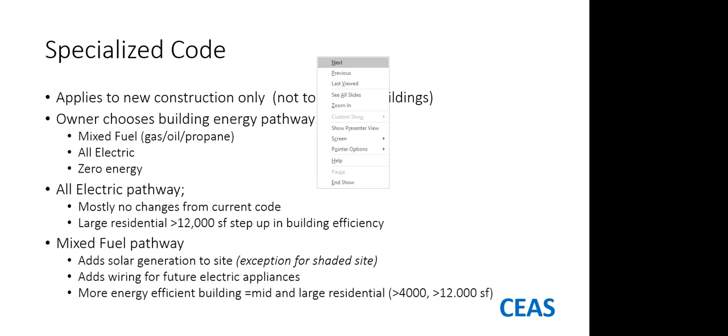It's frozen up again. Okay, so just skip the slide.

On that last slide, it said you didn't have to have solar if you were in a shaded area. So there's an exception for shaded areas for houses less than 4,000 square feet. For greater than 4,000 square feet, I think - and Paul's going to correct me on this when he gets up - I think you have to try to collect as much energy as you can if you're partly shaded.

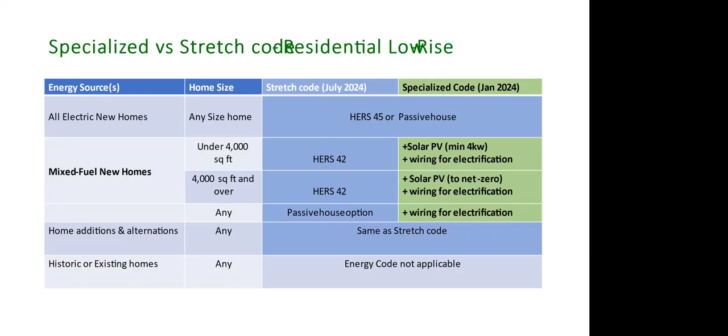Okay, so finally, this is my last slide. Coming back to the reasons for it, building emissions are a principal contributor to total emissions. And it's an important step to address building emissions, to adopt the specialized code. That's why Chelmsford is doing it, and I hope that people from other towns are considering this also.

So with that, I'm going to get out of here and let Paul, I'm going to introduce Paul.

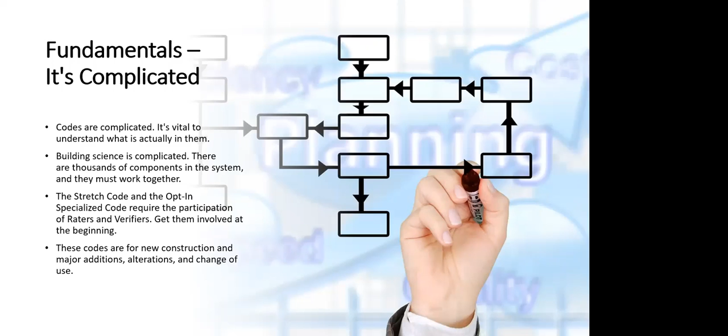If you build an energy efficient home, where do we put the vents for HVAC? The heating systems are on the outside wall, usually under the windows. So if you have better windows and a better wall, you don't need to run the ducts out to that outside wall, and the duct runs can be shorter. The heating system can be more efficient and have less capacity. Particularly if you're using mini splits, there's no ducting and no leakage in the ducting.

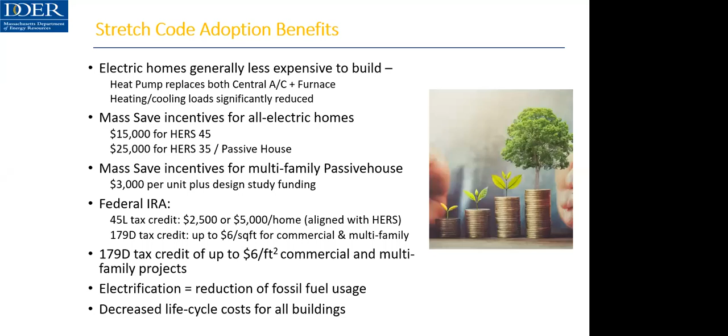Paul, question on this — you say it's 4 communities today. What was the date of that? It's actually 6 communities now. Is that a town meeting they voted themselves into? Yeah, they sort of got in real early. I don't know exactly when they decided to do that, but they really wanted to lead the pack, and most of them are around Boston.

You know, I do, but not off the top of my head — I'm getting old. Brookline, yeah, I think it is. Should be 8. 8, yeah. Brookline, Cambridge, Watertown, Somerville, Lexington, Newton, Lincoln, and Boston, pending signature last week. This thing's moving faster than I can stay on top of it. I just wanted to clarify because of the recording. That's great, it's in posterity, therefore it should be annotated, otherwise there's misrepresentation.

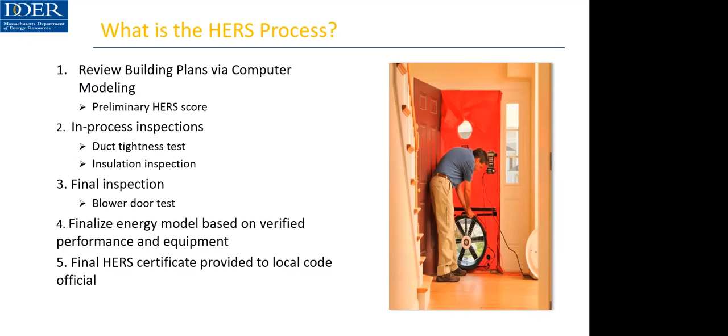When you get down to a HERS rating of 42, you see this big hole? For that house, the hole for 42 is about this big. It's pretty amazing how tight that is. All right, so that's basically a HERS score.

The passive house goes even farther than that. It goes to a leakage of 0.6 ACH50, that's air changes at 50 pascals. Standard houses are around, most of the code is around 3 air changes at 50, so that 0.6 is incredibly tight.

They're primarily heated by solar and internal gains. I had an architect once tell me that if he had 6 people over for dinner, that was all the energy he needed to heat his house. If he could get 2 of them into a fight, he could send 3 of them home. But people generate a lot of heat.

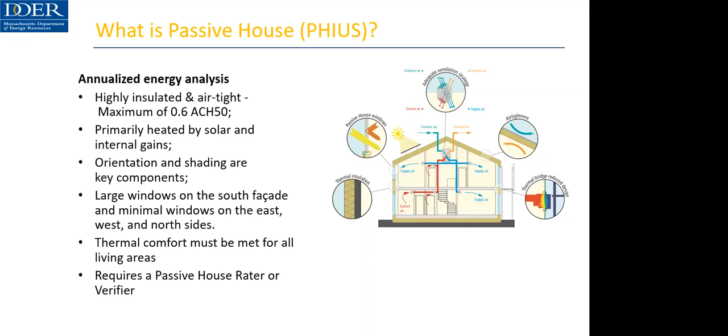Orientation and shading, so you keep the heat coming in and going where you want it to be. The Passive House Institute has a very comprehensive manual, and you need a Passive House verifier to get it done. One of the other requirements, in the ventilation code now, is heat recovery ventilation.

When you get houses that tight, you need to ventilate them properly, and the code requires heat recovery ventilation or energy recovery ventilation. The outgoing air stream exchanges some of the heat during the winter with the incoming air stream, or the heat and moisture if you're going with energy recovery.

What is the difference between heat recovery ventilation and energy recovery? The difference is... is that what this is? Yeah, no, that wasn't it. Okay.

The difference between a heat recovery ventilator and an energy recovery ventilator is that a heat recovery ventilator exchanges the warmth from the warmer airstream with the cooler airstream. An energy or enthalpy recovery ventilator exchanges not only the heat but also the moisture from the wetter stream to the drier stream. So if you're in an air conditioning climate and it's hot and humid outside, the air conditioned house dries out some of the air coming in.

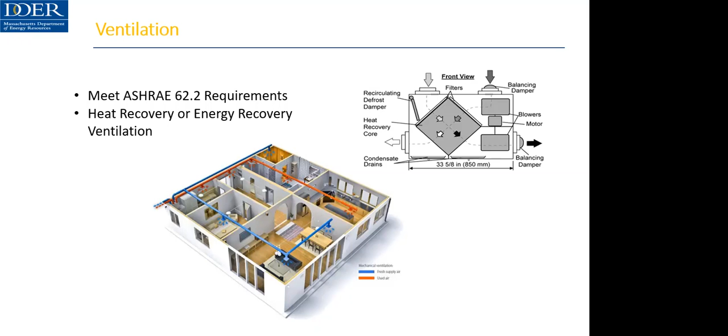And there are some new ventilation systems that actually include heating and cooling coils right in the ventilation system, so you can use this for heating, cooling, and ventilating all with one product. The technology is changing as fast as I can speak, and I don't speak fast.

These have a fan inside, they're electrically powered. What happens if you lose power? You have to open a window. Yeah, if you lose power, you've got more problems than just your ventilation system. I mean, the beauty of ventilation is you could just open your window.

And one of the other things that the code is requiring is EV readiness, electric vehicle readiness. There's a difference between EV capable, EV ready, and EV installed. Basically, you have to provide for somebody to park an electric vehicle in their driveway — at least you have to have the power available to put it in.

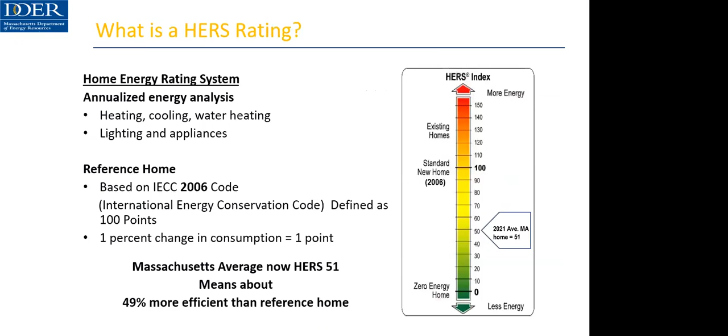Aren't you really aiming at 45 instead of 42 for the electric? Well, I'm talking about what happens on the specialized code if you go all the way — if you go to the specialized code, you're looking at the HERS 42 number. I thought it was still 45. That's a really good question, Bert. Maybe that's where your savings come from — that should be 42 to 45. I don't think that's quite it, but I will look that up.

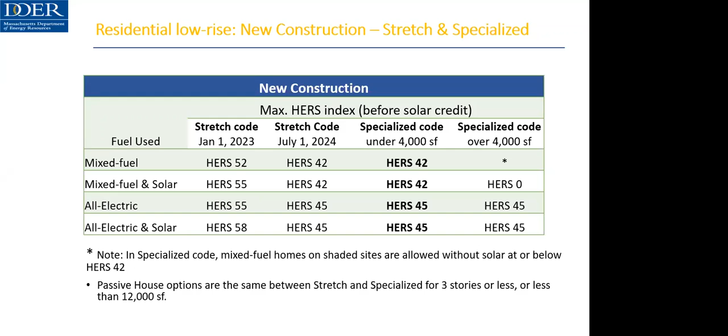When you're doing your trade-offs, is there anything in the model you can start to see? Well, that's what the HERS rater can do. As a HERS rater, I could advise my clients as to what kind of insulation to use. I had a builder last night tell me his HERS rater said that, doing a gut rehab, he felt he had to foam all the walls in the house to get to the HERS rating. Well, they were making wrong assumptions there to begin with, but there are alternatives to foaming the walls — foam insulation is expensive. If you wrap the outside of the building with like 2 inches of foam board, then you're insulating all the studs as well as all the cavities.

So there are different ways to approach this, but you need to have a rater or verifier who knows what to do. And that goes particularly for town buildings, because there's a lot of things in the new specialized code about thermal bypasses, and you need to deal with all of those.

All right, and then one of the other questions that came up was, all right, we're going to go all electric, we're going to do all these heat pumps, we're going to do all these electric vehicles — can the grid handle that?

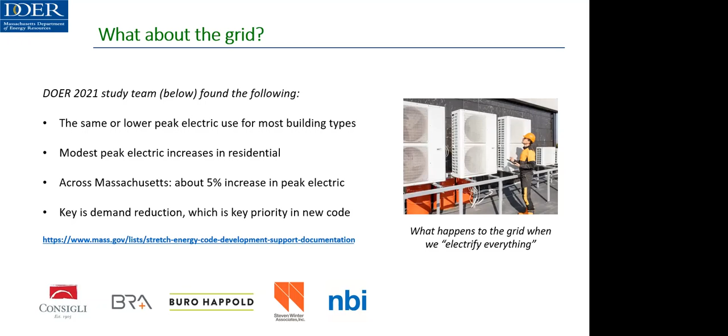Energy efficiency will save about 12.8. Photovoltaics behind the meter - I'm putting solar panels all over my roof. I'm in a historical district and my historical society let me do it, so I'm putting solar panels all over my roof to offset the new heat pumps I'm putting in. And when you add all that up, you get 24,192 plus gigawatt hours offsetting an increased load of about 9,000. So the grid can certainly handle it.

So this is assuming electric vehicles are personal electric vehicles, replacing all the things getting replaced by personal electric - not commercial trucks - for transportation, as it states here. Or is it just based on old energy use? Good question. I don't know, Frederick.

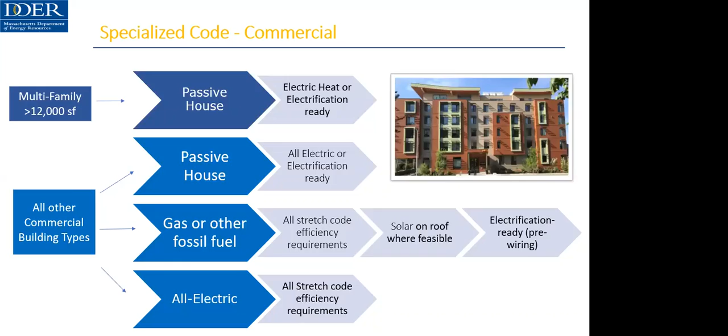Did somebody say TEDI? TEDI?

Yeah, TEDI is another way of, besides the HERS rating and the specialized passive house approach, evaluating all the energy consumption in the building, and it's more directed at commercial buildings. But it's just a summary of all the energy that's being generated and used in that building.

So January 1, 2024, those folks will go into the specialized code. But on July 1st, 2024, the stretch code will go to those things anyway. So if you don't opt into the specialized code and you stay with the stretch code, you'll be there on July 1st, 2024 anyway, for multifamily.

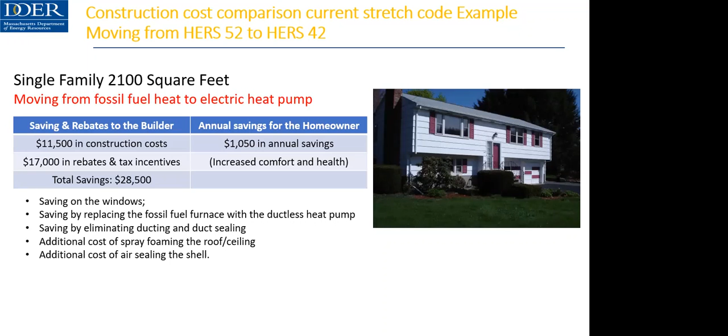Okay, now your question. I seem to remember there were 3 categories when you talked about EVs. Wasn't EV ready in the middle, and then there was a third one where you had to have a connection? Yes. So maybe EV ready is just making sure you have enough electricity in your service to cover it. That's connected.

So EV ready means you have a 240 volt grounded AC receptacle out there, so there's this thing right there you can plug into. The point is I should be able to drive it the next day, be able to plug in right there—that's EV ready. EV capable just says the panel has to be there, with enough space. I don't have to have it upgraded, as it doesn't have to be wired for it.

I appreciate there's a million and one what-ifs and what-abouts, we could go on until midnight. The question I have for you is, as a town meeting rep, the question before town meeting is whether or not to replace one energy standard with the other. Besides being seen as leaders in the state for energy conservation, why would we want to make that change?

I don't know, I really don't know. I asked, do you get more money if you're doing that? And the answer is not at this time. So it's really just that you want to be at the forefront. So besides patting ourselves on the back, we would add complexity to our regulatory code within the town structure, within the building department permits, contractors and builders, things like that. But what's in it for us?

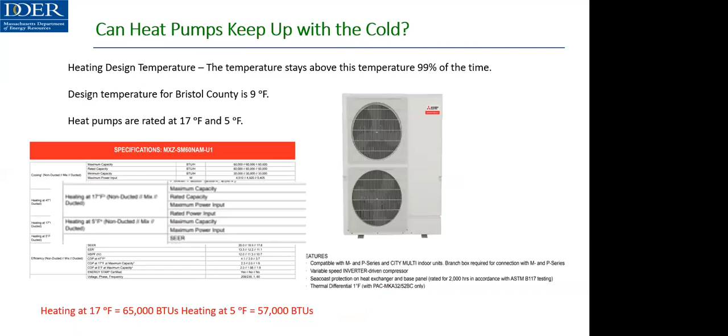Yeah, I think the answer there would be that the town committed 2 years ago to net zero. The town—I don't know if you were aware—we're gonna do it. Yeah, I told her that's the reason, I think that's the reason. Not really because we're getting a grant, you know, like right now.

I think this is one of the questions we'll have to answer at town meeting in a couple of weeks—what's in it for us besides feeling good about ourselves? I don't think so, I think it's just doing what's right. I mean, if we're not gonna do the 2050 goal, why don't we get rid of it?

I think the question is, if we're going to keep this, we should do things, but the way I would look at it is that this is one of the first steps to make sure new construction can get electrified and move in this direction. The big portion of this is about the additions and significant renovations - that's the question we're struggling with, where DOER hasn't given clarity.

It's a no-brainer in the general sense, as you pointed out with construction. If there was a way to slice this down, you could have. If there's a way even for the building inspector to give waivers on additions and renovations - as a town rep, I'd say if the homeowner is making a good effort about the appropriate installation, that they're able to add solar but don't want to get rid of their gas stove, I'd be fine writing a waiver. As a good citizen of the town, I'd accept that person saying you've done more than enough of the list there.